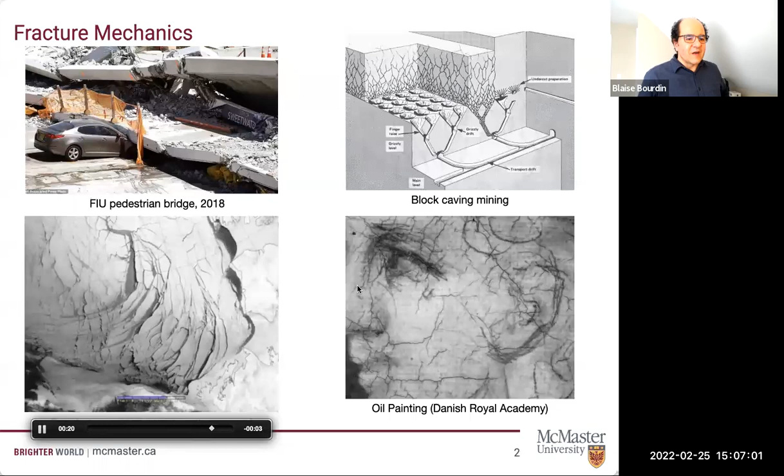And the obvious would be, will there be a channel so that this route is navigable or not? But also, are there going to be small icebergs or big icebergs and so on?

Bottom right is an oil painting. So it's an infrared picture of a detail of an oil painting. And so you see these wide gray lines. So these are the artist's sketch. That's not what I'm interested in. But you see these thin black lines, and these black lines are these craquelure patterns.

So there's this fracture of the paint itself, and they're caused by the fact that the substrate, the canvas, stretches at a different rate than the painting itself. And unfortunately, most of the artwork that we have has suffered some changes of environmental condition at some point or another, so it already has a fracture pattern.

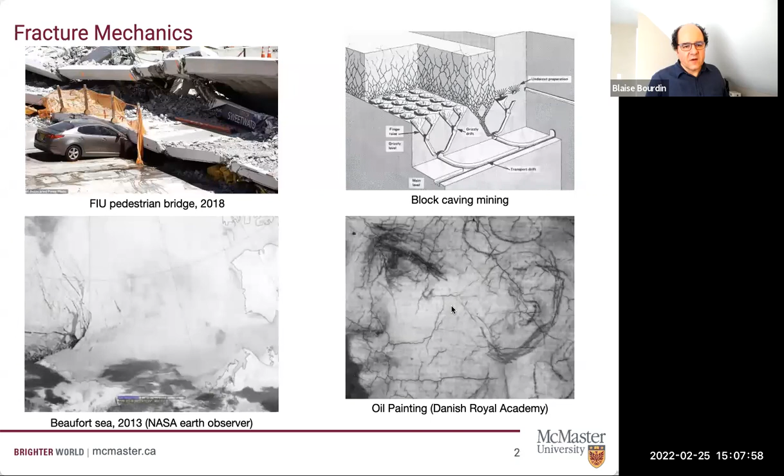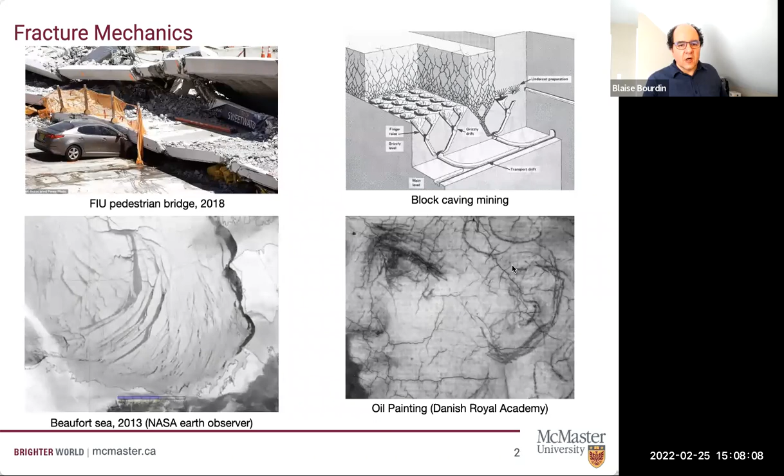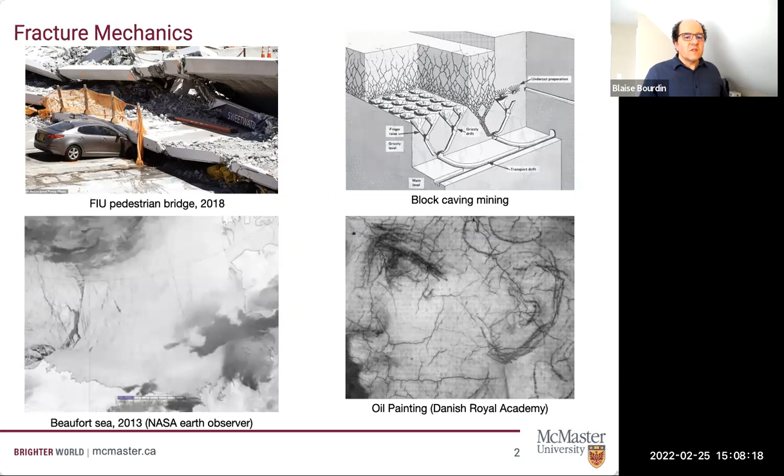There's a huge community in the art preservation field that really wants to understand what is the impact of environmental condition on the aging of cracks, on the aging of fracture. And they want to answer a question as simple as, what temperature and what rate of humidity shall I store a painting so that it will survive, and so we can pass them to the next generation?

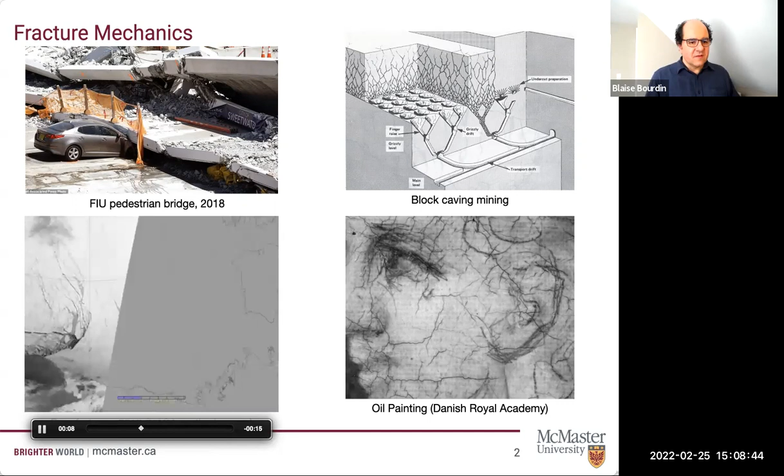So you see, in all these examples, it's not sufficient to say that fracture is something terrible we want to avoid. This fracture is really something we want to understand. And to me, understand means being able to predict. Okay. So with that, we'll start to build a theory to do that. And so the theory that I'm going to build is based on the idea of Griffith. So that's a theory that started in the 1920s.

And I'm going to give some kind of rewritten version of history, mostly because I want to use modern mathematics to describe old papers. But a current formulation of the problem would be the following. So you have a linear, brittle, elastic material. So linear means small deformation, that the stress and the strain are proportional to each other.

Brittle elastic means that this material can behave in two different ways. It can stretch in a perfectly reversible way, or it can break sharply. And one way to think of a brittle material: if you can break something and glue it back in place, it's brittle. So ceramic is brittle, but an alloy at high temperature, which is going to have some plasticity, permanent deformation, and so on, is not a brittle material.

I'm going to assume that everything happens slowly, so that's a rate-independent hypothesis. Because everything happens slowly, speeds are not really involved, but it's convenient to keep track of something that I will call time. Think of time as simply a quantity that flows only one way, and it describes that the fracture phenomena that I'm trying to describe don't depend on any velocity. But if you play a movie backward, you don't want to see pieces of the material going back to their initial configuration.

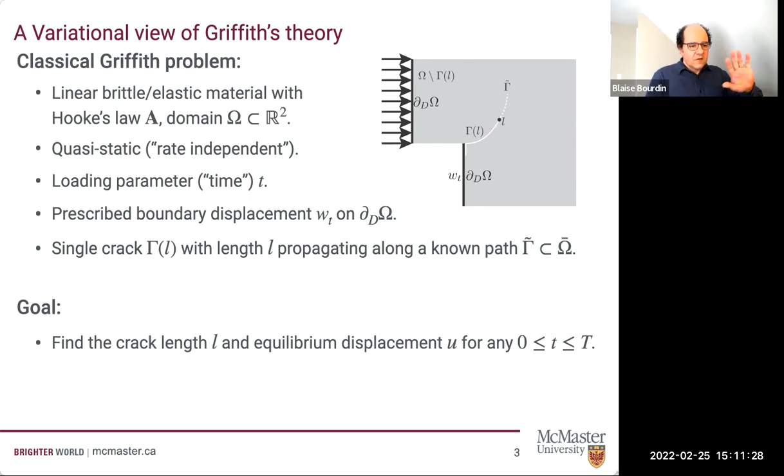So we're going to do that step by step. The first step is going to not worry about the crack, but just look at the equilibrium displacement. So what we're going to do is we're going to fix the displacement. We're going to do the prescribed displacement. We're going to fix the crack length L.

And okay, classical theory of continuum mechanics tells you that given t, so the loading, and L, the crack length, and if you know L, you know gamma of L at this stage, the equilibrium displacement minimizes the mechanical energy. So that's the 1/2 of A e of v, e of v, is called a strain energy density associated to a displacement v. The e is the symmetrized gradient, that's also called a linearized strain.

So again, knowing the boundary displacement and the crack length, if you minimize this, we'll call U of t and L the minimizer of this energy. And the value of the energy, so F of U of t and L, is the potential energy, that is the mechanical energy associated with the equilibrium displacement. Okay, so this is just elastostatics.

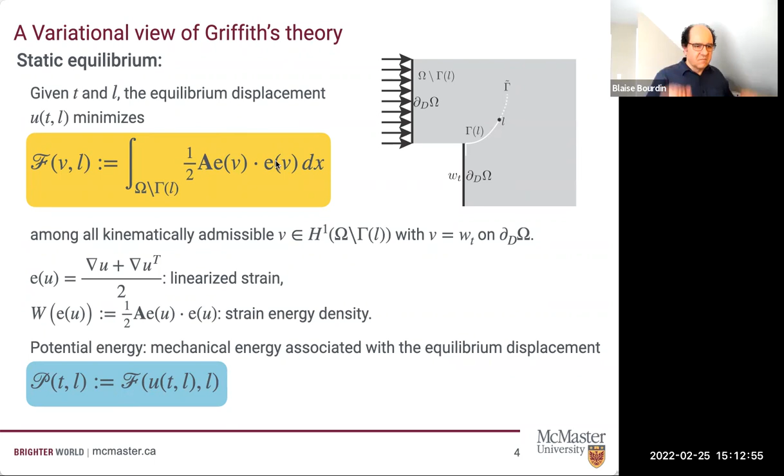And if you're not really familiar and you're a bit intimidated with the A and the E, just think 1/2 of gradient V squared, where V is scalar. That's fine. Okay. So Griffith's argument in the paper from the 1920s is based on introducing two quantities.

So the first is the elastic energy release rate. That is the partial derivative of the potential energy with respect to the crack length. So if you think a little bit, if you increase your crack length, then along the crack, displacements don't have to be continuous anymore. So the space of admissible displacements becomes larger. So the value at the minimizer becomes smaller.

So P of T and L should be a decreasing function of L. And so we're going to use its opposite. So G is negative dP/dL. Again, the right way to think of that is you fix the load, you do a small crack increment, and you measure the reduction in potential energy. So it's the elastic energy that is released by a crack increment.

The second argument is to say that in order to grow a crack, you need to do something. So the most basic version would be to say, I need to cut some atomic bonds between molecules. That's what forms a crack. And the cost of doing that in 2D is going to be proportional to the length of the crack.

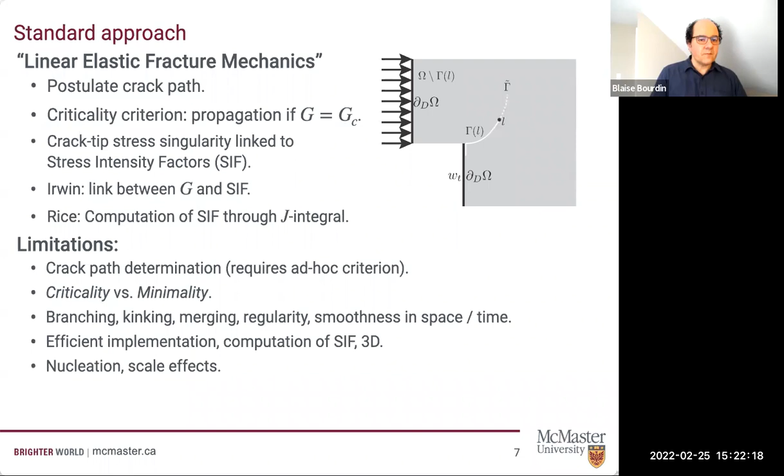And for some reason that I won't really describe, this type of theory behaves very poorly if you want to study really complicated problems when you have changes in fracture topology. So kinking, branching, or merging of cracks, or cracks that may not be very regular in space or in time, and so on. So what can we do instead?

Well, in the mid-90s, the math community became really enamored with so-called free discontinuity problems, and many of them came from the image processing community. But the idea was to apply this theory to Griffith's fracture, and in particular, Francfort and Marigo in '98 in France really proposed to do the following. Instead of postulating the crack path and minimizing the so-called Griffith energy, why don't we take the energy for what it is, the sum of the mechanical energy plus Gc times the length of the crack, and minimize it with respect to what? With respect to any admissible displacement and any crack set.

So essentially, this is just being even more Griffith than Griffith: to keep all the essence of Griffith, but postulate that the crack geometry itself should follow all the same criticality arguments.

There are over 25 years of analysis of that, going from deriving a weak form of the energy to get existence of solutions, going from discrete in time to continuous in time, and so on. I'm not going to go through that, but just want to make clear that this is a problem that has been studied really, really carefully, and for which lots of analysis has been done. And so we know that this problem admits solutions, and so on and so forth.

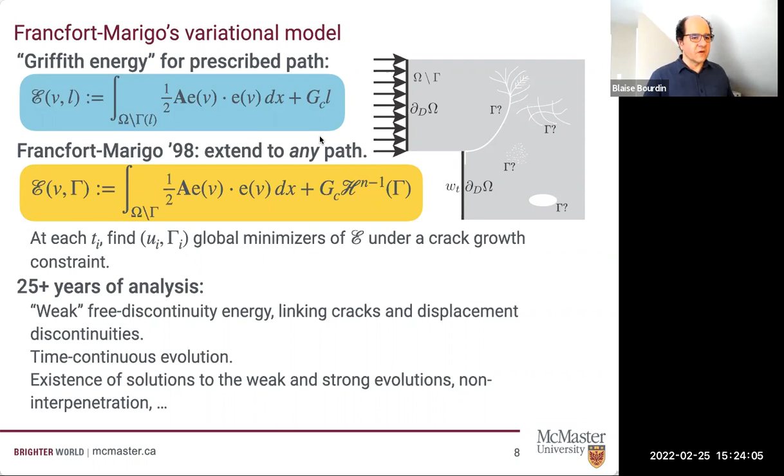That said, that doesn't tell us how to solve the problem. And that's finally where the phase field comes into the picture. So again, recall the form of the energy. And remember that what we want to do is to minimize this energy E with respect to not only any displacement field, but also all crack geometries.

So this is a difficult problem. There are lots of ways to deal with displacement fields that are not continuous across a given surface. But if the surface of discontinuity, the crack, is itself not known, then the choice of method is much more limited. And issues such as the ability to not only reproduce the position of a crack, but also its length, as silly as it looks, are actually very complicated. But something that the image processing community had been thinking about a lot at this point.

And so what we did in the mid-90s was to borrow this idea coming from the image processing community, and to build a phase field approximation of the Francfort and Marigo energy. That is to introduce an order parameter alpha that is a smooth function taking values between 0 and 1, a regularization parameter, two interpolation functions, a function A that is monotonically decreasing from 1 to 0, W that is monotonically increasing from 0 to 1, both of them smooth, and constructing this energy.

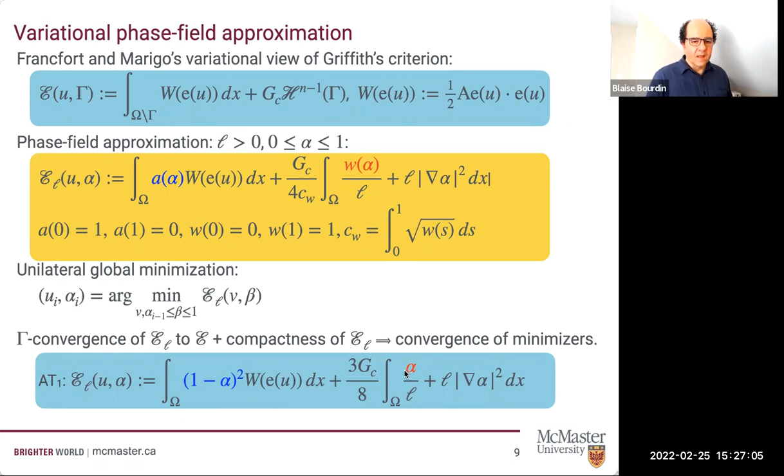Okay, so all this is implemented in a code that I've developed for a long time. I won't go through all the details, but just want to mention that this fracture code, mef90/vDef, is open source, and you can download it here. You can even download a Docker image, so you can really be running a fracture problem in half an hour starting from nothing, if that's something you're interested in.

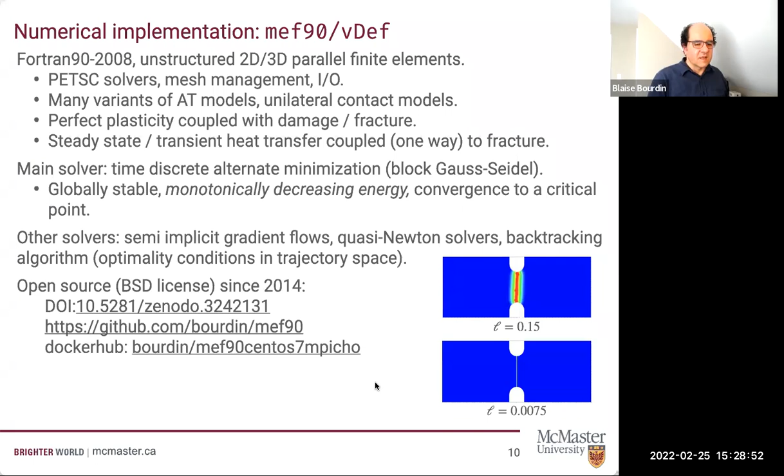Okay, so that's great, but does it work? Well, to a large extent, it works really well. This is an example of what is called a compact tension experiment. You have a sample, a rectangular plate with a notch, holes, and...

Blaise, yes, I think there's a question. Is that okay? Yes, sure, Robert?

Of course. May I ask, there's an underlying discretization of the domain, and what form is it? Okay, well, it doesn't really matter, but because I do solid mechanics, I use finite elements because I want to be able to handle complex geometries in 2D and 3D. My code uses triangular or tetrahedral first or second order finite elements. Almost all the examples that I will show use linear finite elements. That works fine enough. Thank you.

Blaise, you're not really adapting them to the crack as it evolves or anything. You don't have to, right? At this point, I'm not doing any of this, and we could discuss that, but there's something really dangerous in doing mesh adaptation because you're doing a minimization problem. If you do mesh adaptation during your minimization, there's a chance that you're changing the energy that you're minimizing at the same time you're minimizing. And that becomes the classical problem of the dog wagging the tail or the tail wagging the dog. It's not clear whether you're optimizing because you're refining or you're refining because you're optimizing. I don't know how to answer this question, so I'm doing the most naive thing, which is throwing a lot of elements and being patient.

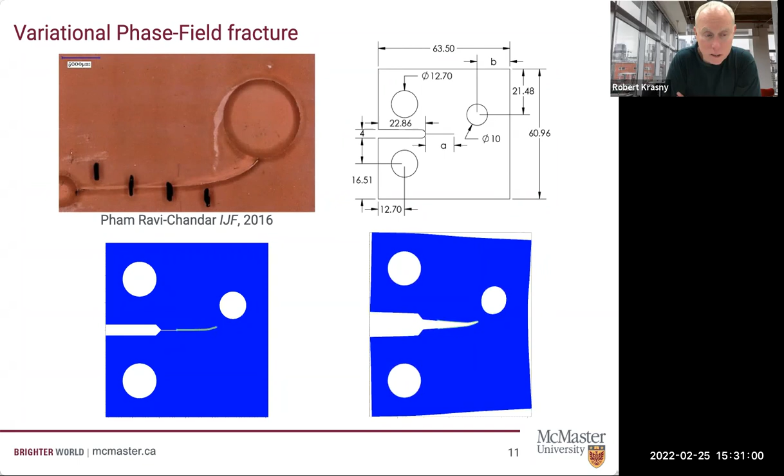One more. The sequence we're watching, are these iterations of a steady state problem, or are these time steps in a time-dependent simulation of the crack? Both. So this is quasi-static. So you're assuming that at each time you achieve equilibrium, so we fix a time step, we minimize the energy, get to a critical point, increase the time step, do that again over and over and over. So you're seeing a large number of time steps that I use to reconstruct this evolution.

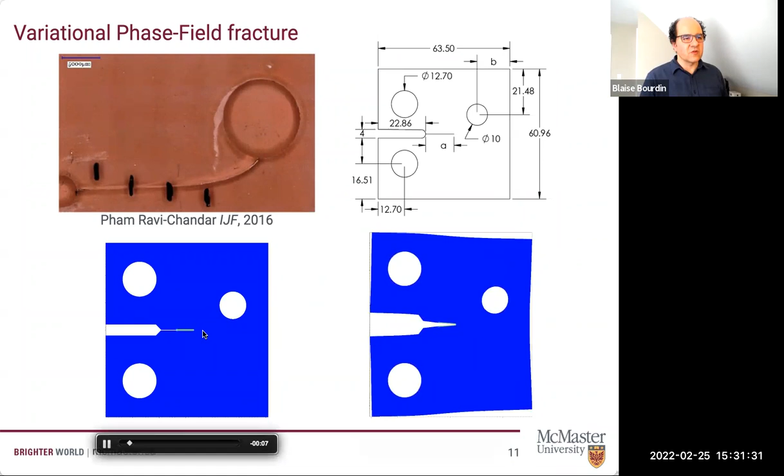And the left and right are the two different values of L, or? So the left and right, sorry, that's a bad professional disease from doing solid mechanics. Left is the crack geometry in the reference configuration, and right is the crack geometry in the deformed configuration. You see there's this opening here increased a teeny weeny bit as time evolves.

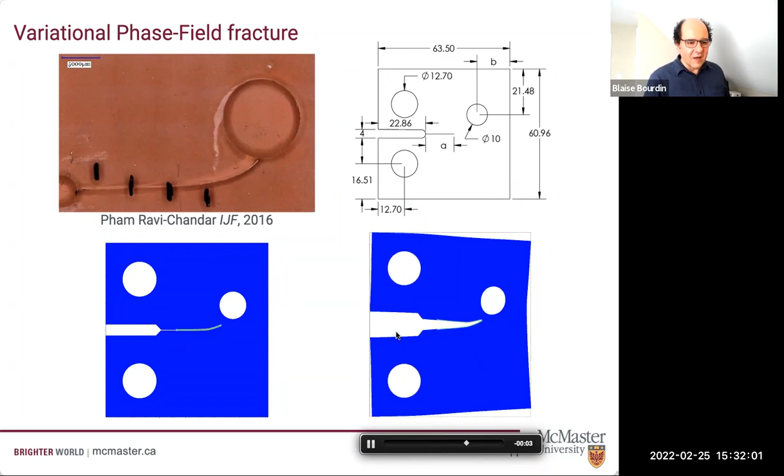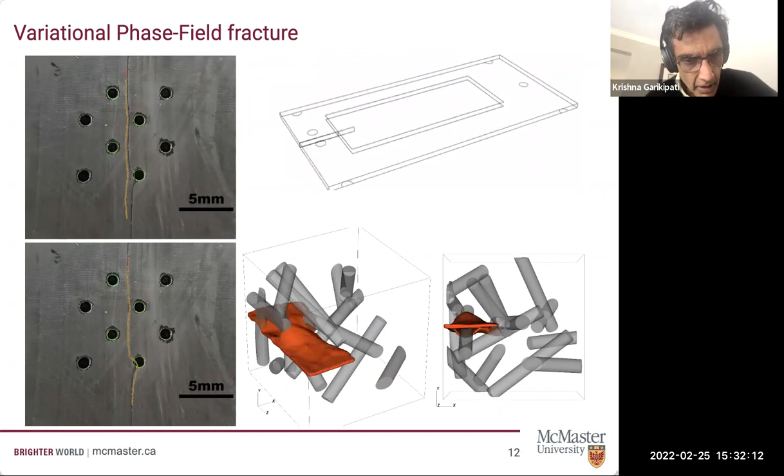Okay. If I may just jump in, it's Krishna Garikipati. With regard to your comment about mesh refinement, I'm sure as you're aware, there are approaches to mesh refinement which bring in notions of configurational forces and all of that, right? So one can do that also in a variational sense. I don't know if that has been coupled in with the underlying variational approach to phase field methods, but there is that

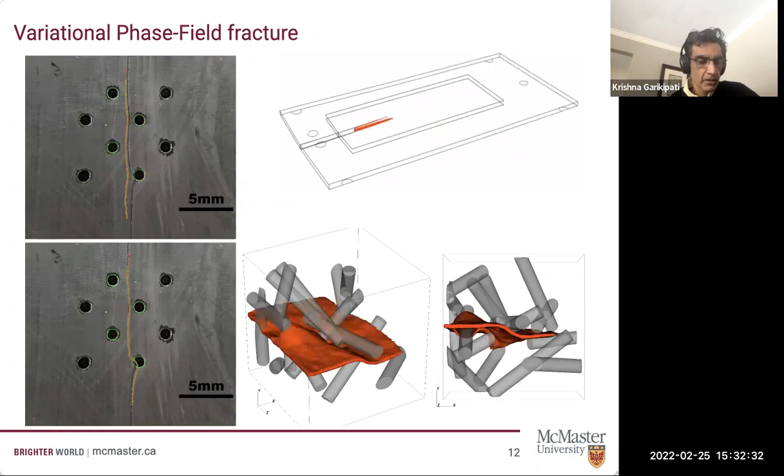branch of it. Okay, the problem is that there are two terms in the discretization error. There's one term that is really the finite element discretization. There's another term that comes from the phase field approximation. And you'd better be really, really careful if you start messing with one or the other one. And I can easily construct examples where any mesh adaptation scheme will give you a completely wrong crack path.

It's really, really tricky, even with some of the methods that are variationally based for the mesh adaptation. Yes, because when you adapt your mesh, you change the energy. Sure, no, I understand that. And it's easy to do that in a way that will lead you to the wrong solution, in particular because you don't have smoothness in time of the evolution and so on. So you're essentially putting yourself in some branch of solution, which may not be the right one.

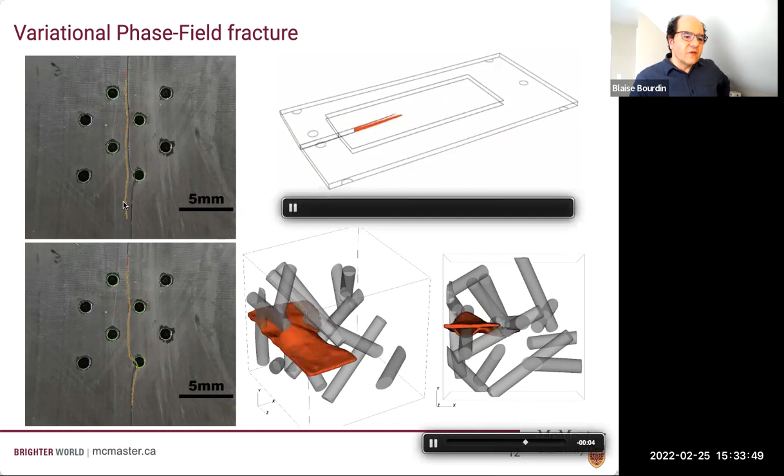Okay. I just want to show quickly, and I'll only focus on the left picture, still going back to how does it work? Is it predictive? So these are two computations that were done by a group of students at Caltech, Changzhen Sui and Neil Brodnik. And we were looking at crack propagation in a domain with inclusion. That's a really classical fracture mechanics problem. It's well known that if you put a hole near the crack path, depending on how far from the axis of the path, your crack may be attracted or repelled or may actually intersect.

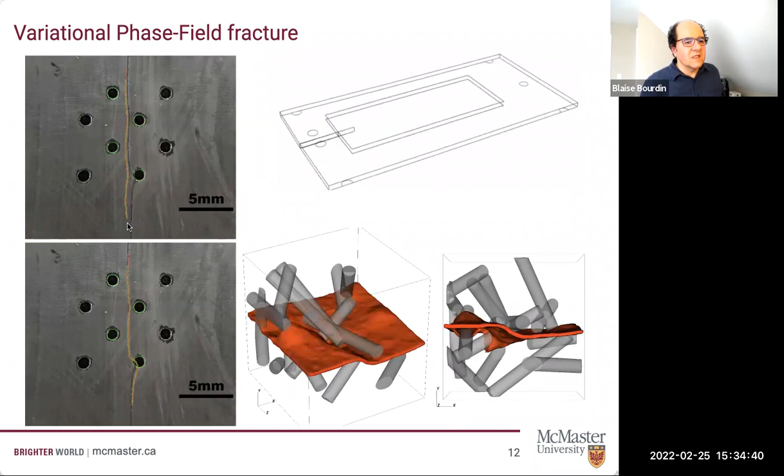And so we generated a geometry. They used 3D printing to generate a sample, created an initial crack, did the first computation. So the color line is the crack that was predicted. I hope you can see this black line that corresponds to the fracture. And we thought that it was okay, but then when they really looked closely at the sample, they realized that because of the inaccuracy of 3D printing, the initial crack in their sample was not where it was meant to be, and it didn't match the one in the numerics.

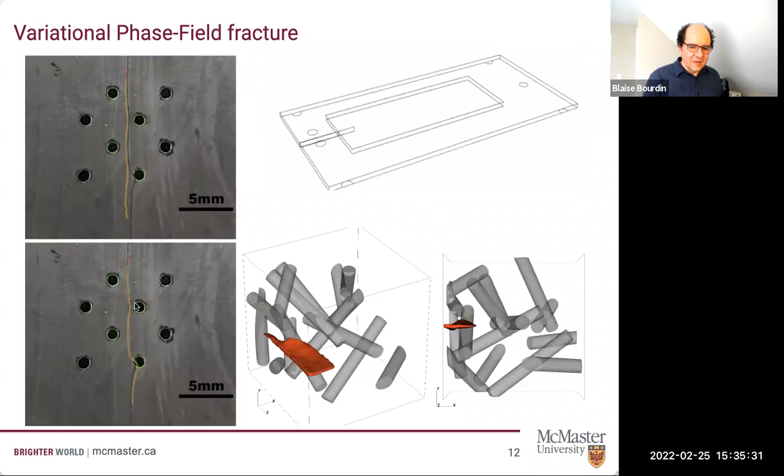So they redid a series of computations where the initial crack is this red line here, where they actually placed the initial crack in the mesh domain based on the scan of the geometry. And so now here is the crack path compared to the experiment. Okay, so we're still a little bit off in this region, but I think this is still pretty darn good. Okay, that will qualify as a part of my success, or the success.

The strength of this type of approach is that we're not trying to compute some kind of asymptotic expansion of the stress near a crack tip and so on. We can tackle problems that are much more complicated. And the type of problem that I'm really interested in is what I call diffusion-driven fracture. And that can encompass a really, really broad range of problems.

That's the idea of a fracture problem where the driving force, or not the driving force in the mechanics standpoint, but the driving phenomenon is not necessarily a boundary load, but maybe something much more complicated. So for instance, think of mud cracks. Mud cracks are driven by evaporation in a slurry.

When the water evaporates, the slurry contracts, it creates tensile stresses and cracks grow. Something that I discovered moving up north is fracture in concrete due to freezing and defreezing, due to the oxidation of the rebar. To the right is a picture that my former student Ata Mesgarnejad sent me,

and it's the fracture in silicon nanowires in batteries. So these are little cylinders that swell by some mechanism that I don't understand in the battery, but in doing so, they observe a generation of cracks. So again, here, if you want an abstract version of that, it would be to introduce a diffusive field P that, for instance, would solve a classical diffusion equation, but in a domain that depends on the crack, and then account for it.

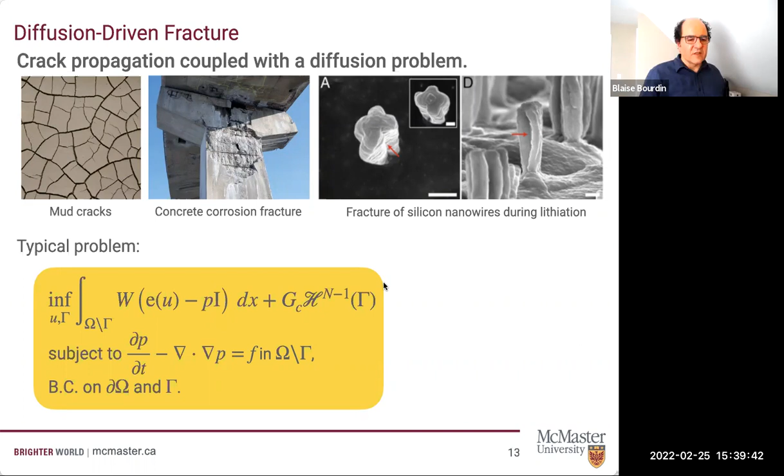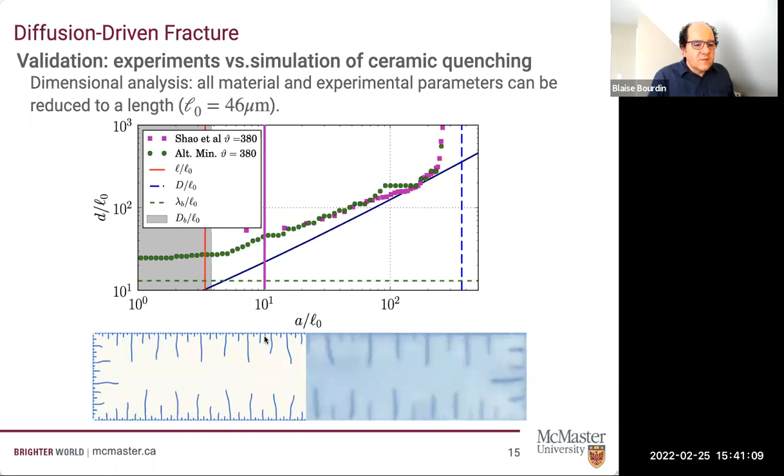And then what we can do is we can look at a closer region around this edge, for instance. Okay, so let's say I only try to simulate a piece of the edge, but do a 3D computation. And what I want to see is if I would be able to reproduce this crazing pattern here. And the answer is yes. And what you see is that if you increase the magnitude of the field, you would go from a simple network of transverse cracks, still with this selection principle, where some cracks stop early and some continue growing, to a situation where you have that, but you also have this complicated three-dimensional pattern.

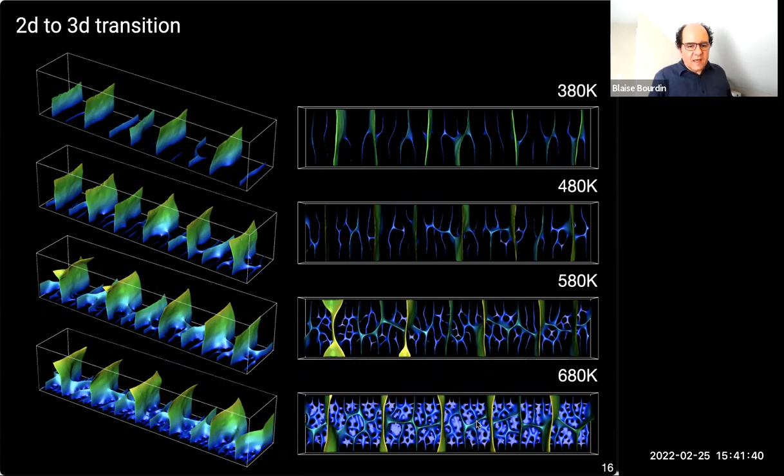And then you can go even smaller. You can try to look at the even smaller scale, what happens next to the boundary. So that's a 3D computation. You can think of this as being inside the material and seeing the crack pattern growing towards you.

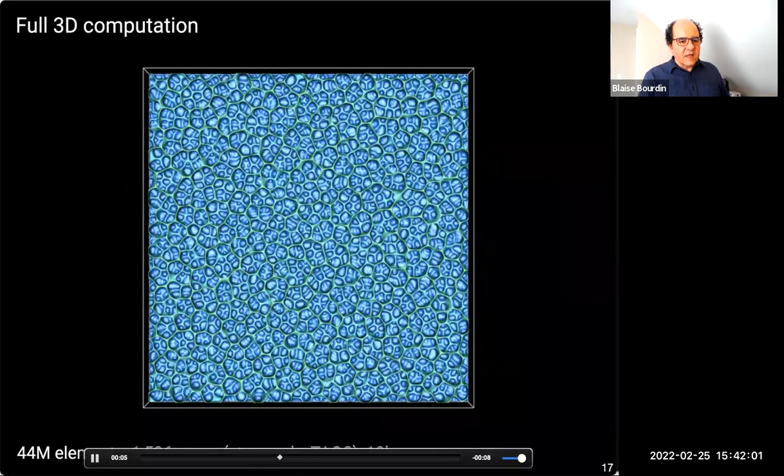And the color is just the elevation. It will help us do some kind of post-mortem analysis. Okay, so we see tiny little cracks going towards you and some kind of coarsening and coarsening and coarsening.

Okay, and so if I go to the end, you see, for instance, here you have 3 cells that have merged into 1 cell, then these 2 cells merged, then these 3 cells merged, then these 1, 2, 3, 4 cells merged, and so on. So you have the equivalent of this selection principle in 2D, but in 3D.

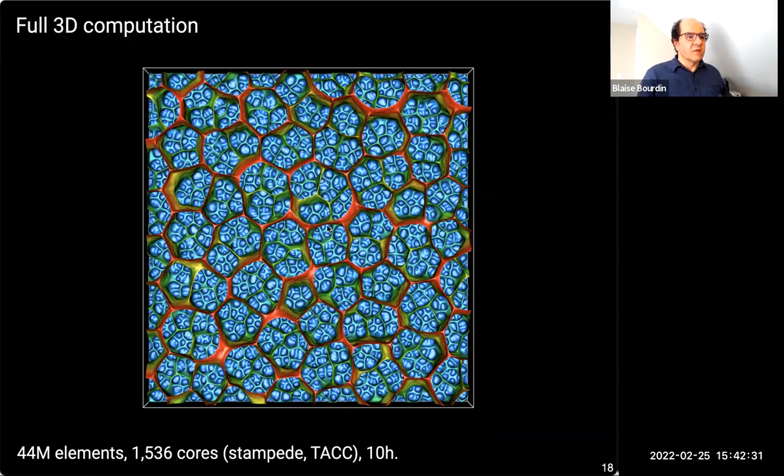So I cannot show a quantitative comparison with experiment because I still haven't found a way to do good quality 3D imaging of this sample and really identify the very complicated crack pattern. Okay. I'll quickly go through that.

So we've applied that to many other problems. One problem that I really like is the problem of laser cutting of glass. That was a collaboration with a glassmaker in Japan. And the idea is, if you think of it as an example of where fracture is important, is not a bad thing, is that nobody knows how to cut glass.

We know how to melt it and we know how to break it. And typically, the way you cut glass is you do controlled fracture. So you can score and break, but scoring and breaking is great for rectangles. But you know, this is not a rectangle of glass. So if you want to do something like that, you need a better method.

And what the glass industry is trying to do is to use a laser beam. And the idea is to shine a laser beam along the crack path. The laser beam causes thermal expansion ahead of the crack or behind the crack tip. And this will, in turn, either pull or push the crack.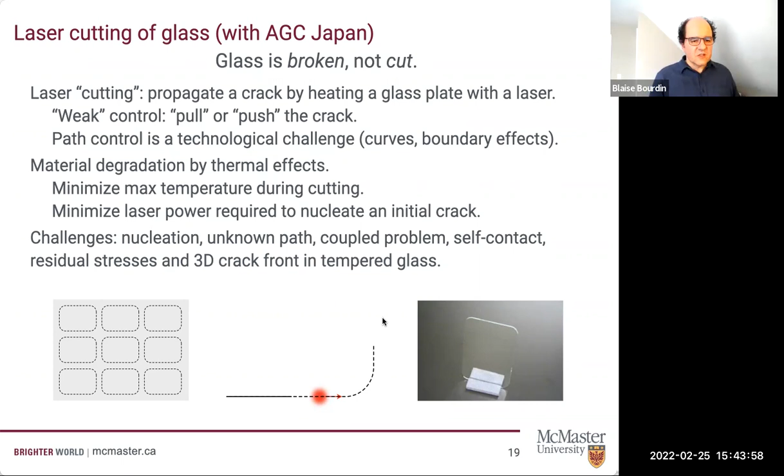They have demonstrations of this, but it's really hard to control the path. There's a weak pinning between the laser beam and the crack, so it's not clear that the crack will exactly follow the beam, or sometimes it may deviate and so on. And okay, I'll just talk about this picture, but this is an example.

What I'm showing here is just one little piece of a very large domain. And I've been trying to grow a crack through laser cutting close to the edge. So the lines are the contour lines of the temperature field. And this curve is the crack. And what you see is that we can predict the deviation of the crack path numerically.

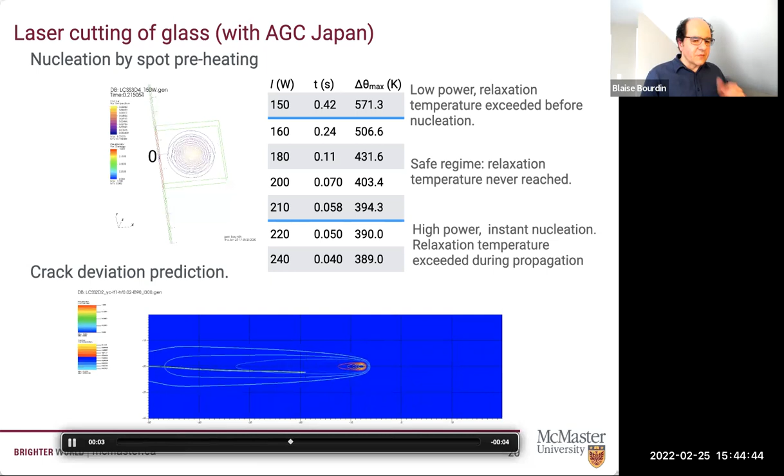Of course, the next step is the inverse problem: where do we want to move the laser beam so that the crack, for instance, grows along this straight line. And this is clearly a complicated and open problem, but something, in my opinion, very interesting. Okay.

Quickly, if you want to do a little bit of mathematics on this problem and solve the fully coupled problem, everything that I've shown so far was a one-way coupling. That is, I was not really accounting for the crack geometry in the heat transfer problem. So let's go back to our diffusion-driven fracture problem.

So we want to minimize some energy that depends on U, the displacement, P, the diffusive field, and gamma, the crack, subject to a state equation, which is a parabolic equation, in a domain that itself depends on gamma.

The difficulty with that is, you now have to couple this minimization problem with the parabolic evolution, and all the tools that we use for the study of the fracture problem come from the calculus of variations. So the very natural way is to reformulate your parabolic equation in terms of minimizing movements.

So you discretize forward in time, and you interpret the discrete problem as the Euler-Lagrange equation for a minimization problem. And now you end up with a bilevel minimization problem. So inf of E of U, P, and gamma, subject to the fact that P is itself the solution of a minimization problem.

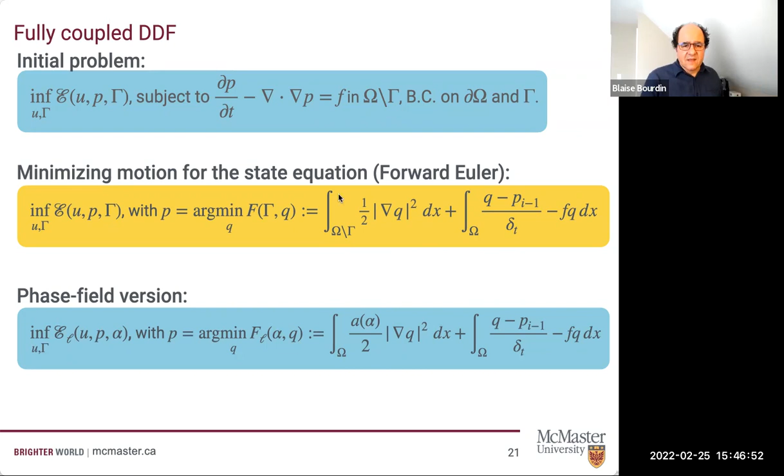Okay, so we know how to regularize these by gamma convergence. That's the Ambrosio-Tortorelli functional. It's not very complicated to figure out how to do the same thing for F. If you want to have this integral over omega minus gamma, you can just multiply by a term that vanishes along gamma, and you can show the gamma convergence of F_L to F. That's simple. Unfortunately, gamma convergence of a functional and its constraint does not imply convergence of the constrained minimizer.

Something we didn't really think of first, and we're not the only one. Lots of people in this business are looking at this two-level optimization problem and just approximate each level separately and don't try to show convergence. So it turns out that for this example, essentially we can show some form of compatibility in the gamma convergence.

And so without going into the technical detail, what happens is that we can show that we can use the same recovery sequence for both problems. And so we're actually able to show convergence of minimizers, of solutions of the constrained minimization problem.

So now you have this coupled problem, and the way we do it is we split the unknowns: think of U as the primal variable, think of alpha and P as two state variables, and they're not as strongly coupled as U and alpha. And in particular, F is convex with respect to alpha and Q separately.

So it's not too hard to minimize E_L with respect to alpha and P under this constraint directly using an adjoint-based Newton solver. So you write the second adjoint problem and so on. It works. That was the thesis of one of my last students at LSU, Alex Dunkel.

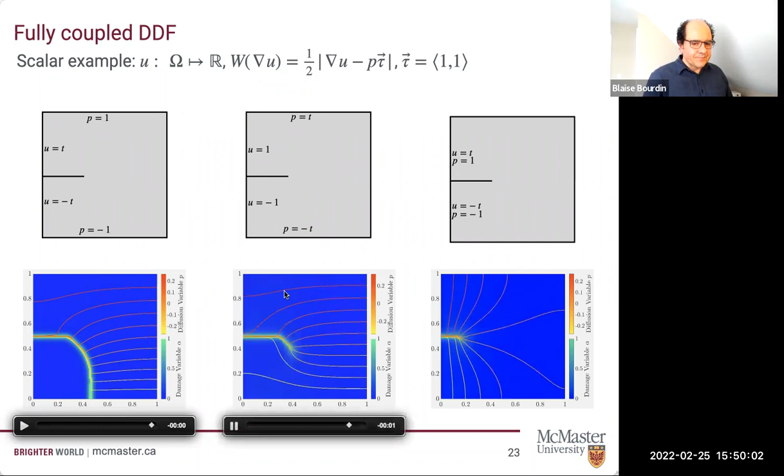Okay, I have 10 minutes.

Well, I'm just going to say a few words about open problems, and one of the challenges is nucleation. The issue is that propagation is governed by the toughness parameter, the GC. That's a given. But Griffith's theory is really incompatible with the idea of nucleation. In particular, it's incompatible with the idea of nucleation being governed by something called a strength.

And if you go to the Home Depot and buy some wire or some cable, you will get a limit load that is given in pounds or metric equivalent. Essentially, it tells you the maximum stress that your material can sustain before it breaks. And I can quickly describe the incompatibility between these two concepts by looking at classical elliptic regularity issues. What you'll see is something you can find in any good book on the topic.

If you look at a domain with a reentrant corner like that, and we assume it's loaded in mode 1, so you stretch something that has a V reentrant corner, you can show that if you do a blow-up near the crack tip, the displacement in polar coordinates will be of the form sigma infinity, the applied load, times r to some power lambda, which depends on omega. You can compute this lambda as a function of omega. That's this curve. It goes from 1/2 when omega equals 0, that's a crack, to 1 when omega equals pi/2, that is, a flat interface.

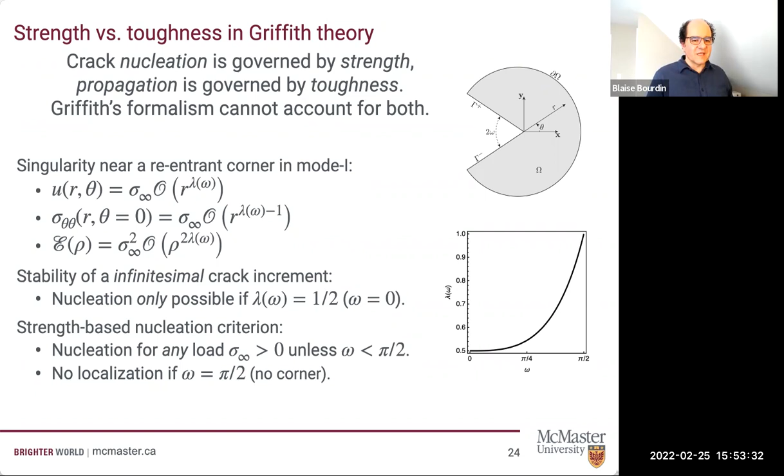Okay, I'm trying to get to what I want to do. Okay, it turns out that you can actually do some analysis of the nucleation problem. And so what you can do is to look at the 1D problem. And for the 1D problem, you can solve the 1D evolution in closed form. And you can show that there are 4 types of solutions.

So I take a beam in the Ambrosio-Tortorelli model, I stretch it. And the 4 types of solutions are: elastic. So elastic means alpha is equal to 0. And it only exists under a threshold. Then you have what I call homogeneous damage. That is, the damage, the alpha parameter, the order parameter, is constant. The displacement is still linear.

Then what I would call partially localized, that is your alpha, your order parameter, is a smooth function, but whose maximum is not 1. And then what I call fully localized, so that would be a function that goes all the way to 1 and back to 0. So that's what we think of as a phase field crack. You see this analysis done in pretty much any paper that's been published since 2010 in the field.

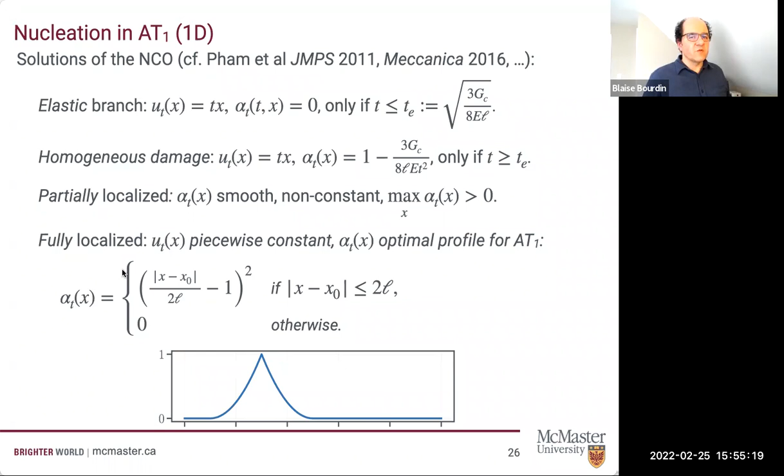What's missing in most papers, and it's done very beautifully in this string of papers by Corrado Maurini, Kim Pham, Jean-Jacques Marigo, and so on, is the stability analysis. And again, I wanted to get to this one because it's pretty important. Because we have a variational theory and not something based on criticality, we have another criterion to decide which of these branches we want, and we want one that is stable.

And so you can do a second order stability analysis and show that the only stable types of solution are elastic or completely fractured. So in 1D, what you have is either a linear response or a crack. And the load at which your crack nucleates, or the stress, is given by this relation.

So GC is the toughness, E is the Young's modulus, L is the regularization parameter. If you know sigma C, GC, and E, you can compute an L such that, numerically, the stress at which you will nucleate a crack is equal to sigma C. So it's given by that.

So Blaise, sorry, Blaise, but we have just a couple of minutes left. Yeah, that's why I'm trying to wrap it up. And I'll just show one picture, or maybe two. Okay, so this is exactly, let me see. Yeah, I'll just wrap it up with this.

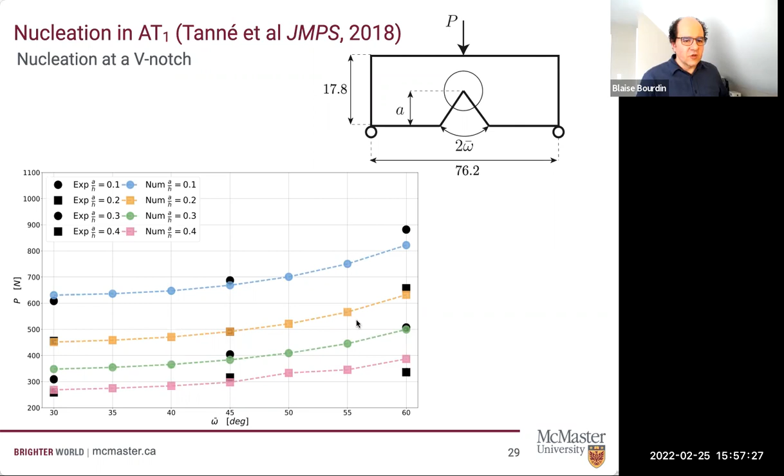And again, we have 0 parameters we can fudge with. The 3 parameters that we have are Young's modulus, fracture toughness, and the L parameter. And the L parameter, we obtained it from the tensile strength. There's nothing free left. So we just plug that in, we run our computation, and you see that we actually match the nucleation load for every single possible configuration.

Okay, so, well, I'll stop here. Essentially I focused too much on the successes and not much on the challenges. The challenge is really to explain, to understand why this is working so well.